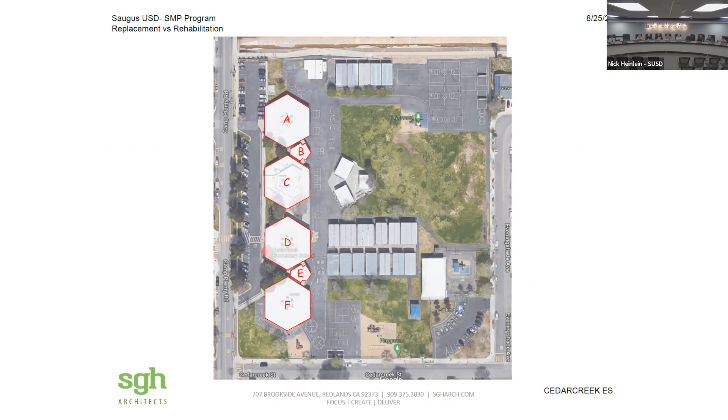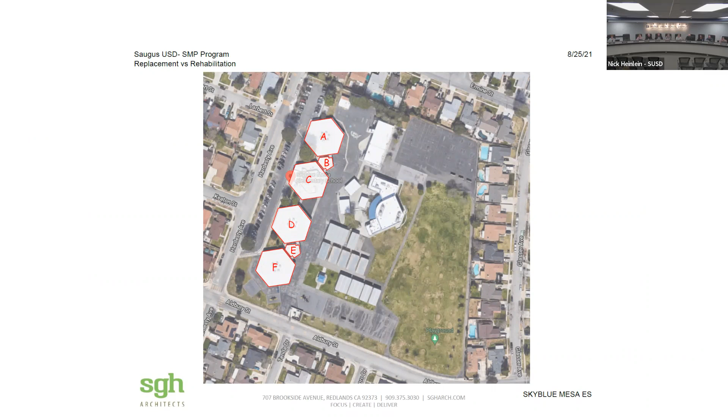Okay, so the first site was Cedar Creek, and all of the buildings A, B, C, D, E, and F are all listed on the AB 300 school site list. When we move to Sky Blue, the sister campus of Cedar Creek, it's the same exact buildings that are on the list. Moving on to Emblem, we have the main admin building, which is A, B is a kindergarten building, and F is the multipurpose building. Those three are on the list.

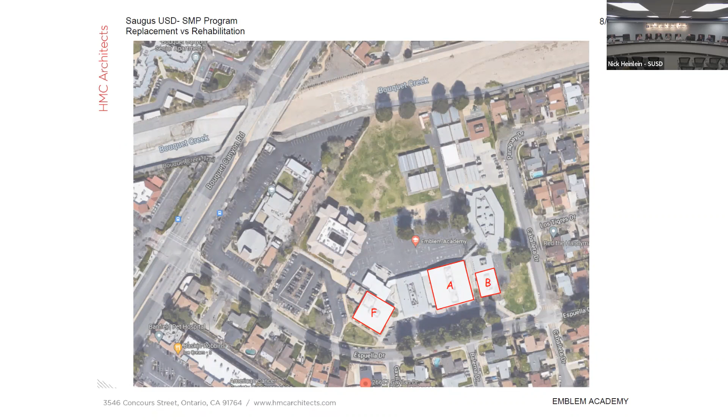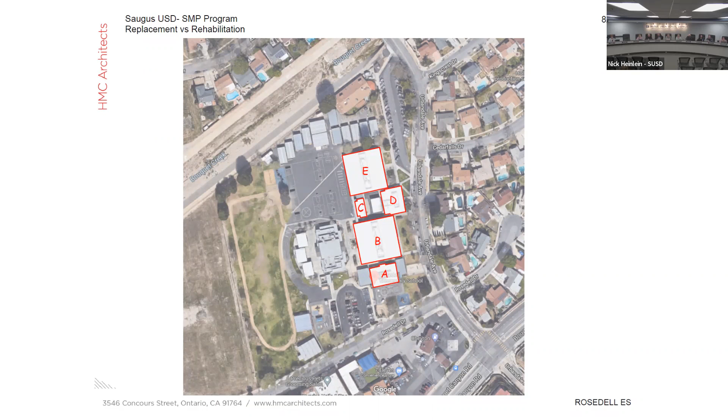A, B, C, D, and E - this is at Rio Vista. Those are all on the list. And then Rio Vista's sister campus is Rosedell, so the same buildings on that campus. I think it's important too to highlight, even though we have sister campuses in two situations, remember seismic issues are not only about the building, it's about the ground that it sits on. So since they're in different locations, the remedy may need to be different depending on the campus that we're at. And then Santa Clarita, A, B, C, D, and E - so the entire part of the older campus.

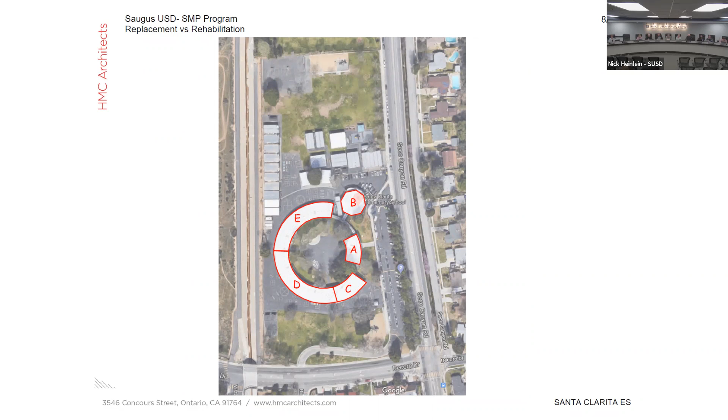So on the actual list, which I have a copy of right here, we actually had 7 school sites on the list, but during that engineer verification process, we were able to determine that Highlands does not belong on the AB 300 list.

So again, the other thing that was done at the November 16th meeting is the board provided us guidance on which phase was preferred for each of the buildings on the list. The phasing is either phase 2 or phase 3 - phase 2 being replacement of the building, phase 3 being rehabilitation. Since then, we've been working on gathering the required submittals, which might impact that decision made in November.

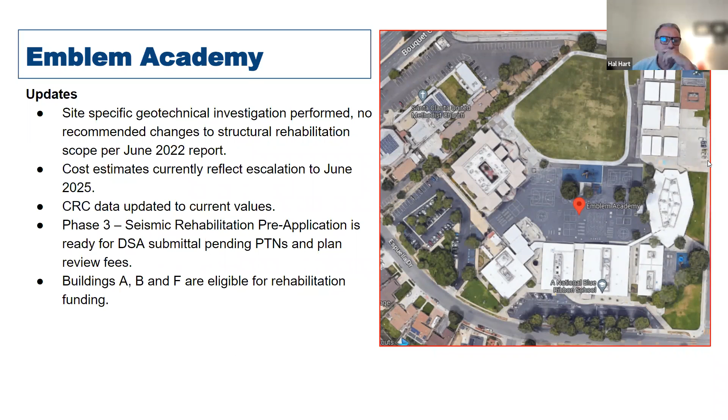Moving on to Rio Vista, a sister school with Rosedell. We feel lucky as well in that the geotechnical reports done in June of 2022 did not reflect any substantial issues regarding liquefaction or the need to modify the scope of work regarding soils, earthwork, or foundation work. Having taken that information, we updated the previous estimates to current estimates reflecting a June 2025 escalation factor, and updated the current replacement cost to current DSA values.

We have the buildings at Rio Vista, B, C, D, and E, eligible for rehabilitation funding. Again, it's mainly looking at structural connections to the vertical and horizontal structural members, increasing their resistance to shear forces from seismic activity, and making sure the foundations are properly anchored to the ground.

We did at Rio Vista look at the cost of the rehabilitation for the kindergarten building, building A, and in that case those costs did exceed 50% replacement value. At Rio Vista, we recommended the replacement option for building A only, with B, C, D, and E eligible for rehabilitation phase 3 funding.

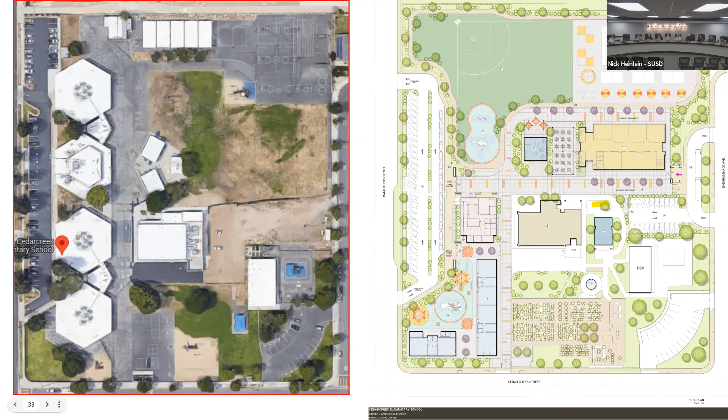Because I think Mr. Petzel's concern over making sure that we're being responsible with taxpayer dollars is a key factor. We don't want to go into this willy-nilly. We don't want to go into this without a plan that we can really share with the community. It will ultimately be a decision that they help us make as we move forward.

But as you saw, $40 million for one of the schools, just doing the math right there, there's 2 schools that would need to be addressed. And then there is the addressing that we saw at our last meeting with the Davis demographics piece and where we are with that.

And so when we look at having 15 schools moving forward, do we continue with 15 schools? Do we re-boundary our schools because of what we're seeing with our new development across the freeway and the possibility that we will not really qualify for that Entrada school that we thought 20 years ago was a slam dunk? How do we do that? And what does that do to the demographic information? And so those are all things that we have to consider.

They're all moving parts that make it difficult to just say, oh, we'll just have one meeting and make one set of recommendations and, gosh, you guys will decide and here we go. So it is going to be a process, but we're trying to do it in as fast a process to avoid the escalation and achieve the funding.

Because we know that the state is looking for another bond possibly to pass, and that if that were to happen, that would be really good for us, but we're not quite certain that even if we get approved, we'll have all the funds available to us, even though we would be eligible for them. So again, back to, you have to be able to have the dollars to pay for the project upfront.

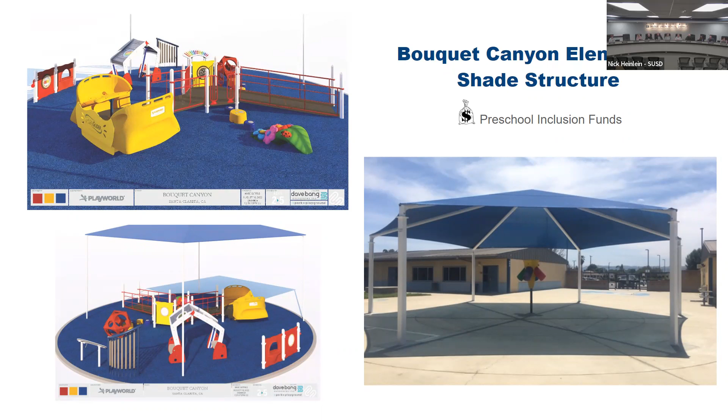It's going to be the perfect location for our preschools because the kids are only there for a couple of years. It's in a nice little quiet neighborhood, and it'll be all set up for preschool kids. We're really excited about it as a good use of future property. Great.

Next up, Cedar Creek Elementary interior paint. This is one of those examples of doing a project at a school site that potentially in the future we have to do some major work at. I didn't put the before picture in here, but the rooms really need to be refreshed.

Peter, do you have anything to say? Yeah, just exciting to provide our students in that community with freshly painted restroom buildings and classroom buildings. These rooms hadn't been painted in about 20 years, and some of the paint was chipping and peeling away. So just to be able to provide that pride for us and for our students, and something that says that we care about you, and a project that we're happy to complete.

It also complements the new lighting that we've installed during COVID, the new Top Cat systems for microphones that we've installed. Looking in the backs of the rooms, the cabinetry is extremely old, a good 25 to 30 years old, and probably another piece that possibly needs to be replaced. And then, of course, the flooring. It seems like simple things, but these are things that do wear out, and we're talking about a long period of time.

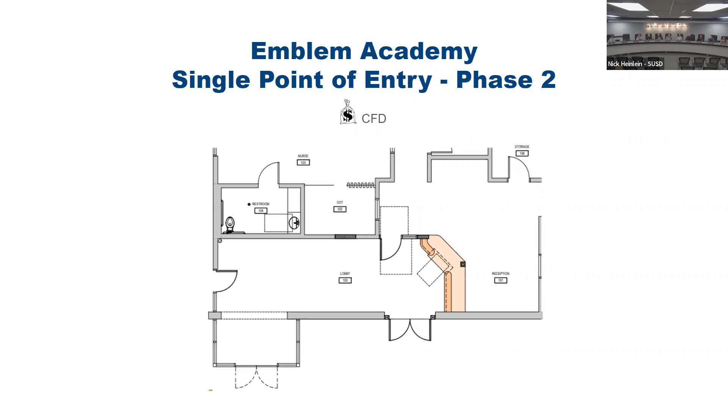We tried to stick with the weird shape that it was. And there was never, even if it was lightly sprinkling, a time the students could be underneath that structure. So this new lunch structure is solar, but it's also completely waterproof. It's humongous. They call it their lunch pavilion.

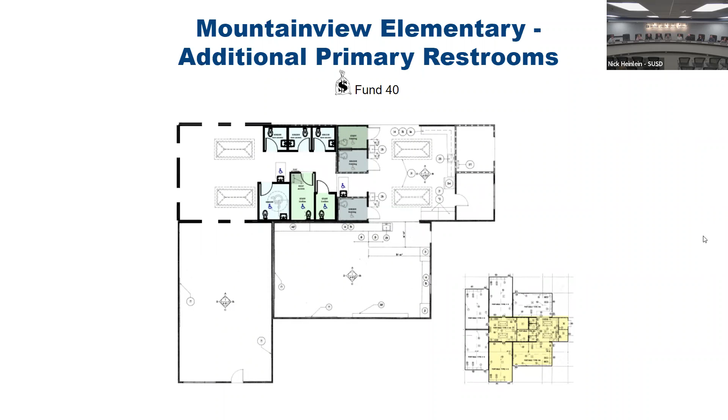I think what's important with this one, and you would have seen it if you saw the before pictures of Cedar Creek, is the movement to a 21st century space. About 6 or 7 years ago, the board was looking for identical spaces. 5 years ago, they gave Mr. Heinlein and I permission to make comparable spaces instead. The goal was that all spaces would have the same look and feel as a brand new building, since we had just finished the new building space at West Creek. And I'd have to say I think we've nailed it, with the buildings looking fresh, new, up to date, and accessible.

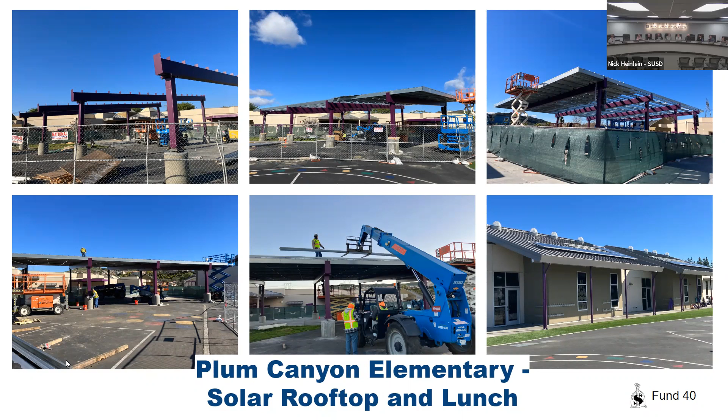Okay, moving on. This is another project at Plum. I'll just leave this here for their single point of entry as well - all the changes we've been looking at in order to achieve that phase 2 single point of entry.

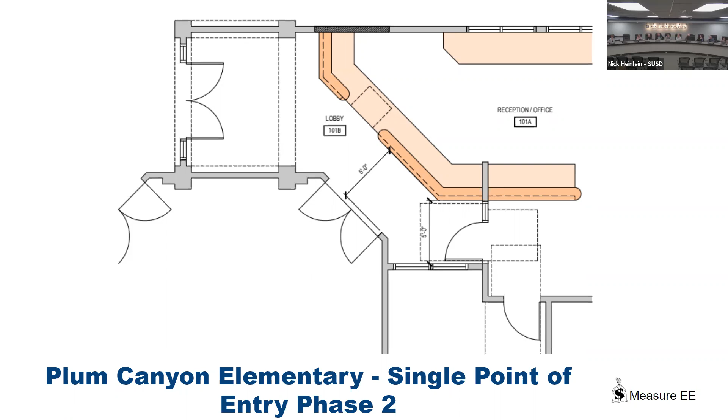Then more solar. Here's Sky Blue Mesa Elementary. There's a solar lunch shelter. I know it's further along too, right, Kathie? It's a little bit further along than this.

The lunch shelters, similar to the ones going on the outside of the new building at Sky Blue, are way bigger than the old shelters they had. And you can see on these projects we don't have any of the fabric on the fencing, so the kids are watching the whole thing and cannot wait to get out there.

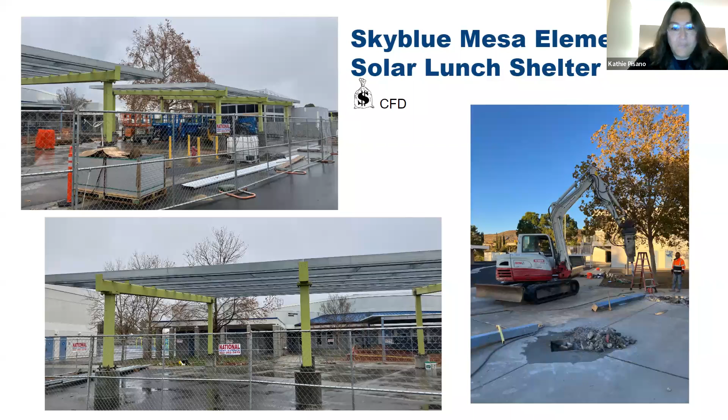Also at Sky Blue, we finished their front office casework and single point of entry. You can see the doors like we put up at Cedar Creek into the office, into the health office, and then into the staff room.

Moving on to West Creek, there's solar and benches. This is another one of Kathie's projects that she's happy to talk about.

These pictures I had shared before with our Citizens Oversight Committee, specifically because the solar was finished a while ago. We're still waiting for a part. We're hoping that comes in at the beginning of March so this can be energized soon. We have to get in line with Edison, and Edison runs at its own pace, so hopefully that will happen soon.

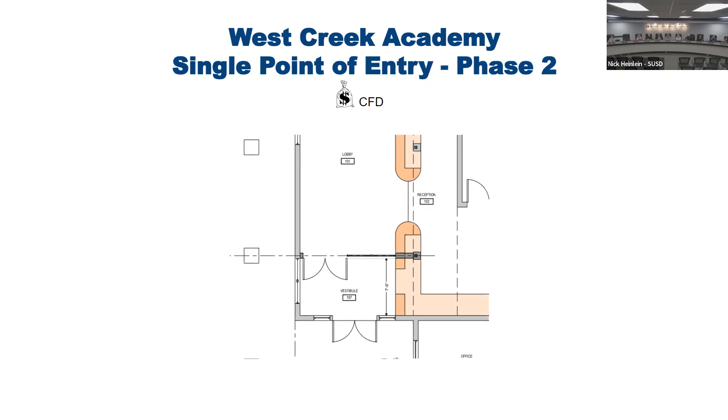And with that, are there any questions and comments?

No questions, but it's super exciting to see all of the work. I recently went with Dr. Hawkins to North Park and to Mountain View. That solar lunch structure is ginormous, and it looks really nice there. I'm super excited about the preschool program and the new equipment there. We got to see the rocker sort of toy that's similar at Mountain View, and it was so cool. And that whole play structure over there is really awesome for inclusion. So no questions, but thank you so much for sharing, a lot of really exciting stuff.

It's a good comment. It's great to see all of these projects now coming to fruition after having worked on the master plan 7 years ago.

I as well don't have any questions, but a couple of kudos. First of all, on the presentation, on each slide, thank you for providing the funding source, where everything's coming from. I really appreciated that. And then when it comes to the phase 2 single point of entry at each of our schools, we had conversation about the front of our schools and security, and I and my colleagues expressed some concerns. Personally, I understand school safety is top priority for all of us, but we don't want to build our schools to be the fortress that a medieval castle is. We want our schools to still be welcoming and beautiful. And as these spaces are rolling out, they are just that. They are extremely secure, while at the same time, they say to our families, welcome, we want you here. I really appreciate that. Thank you.